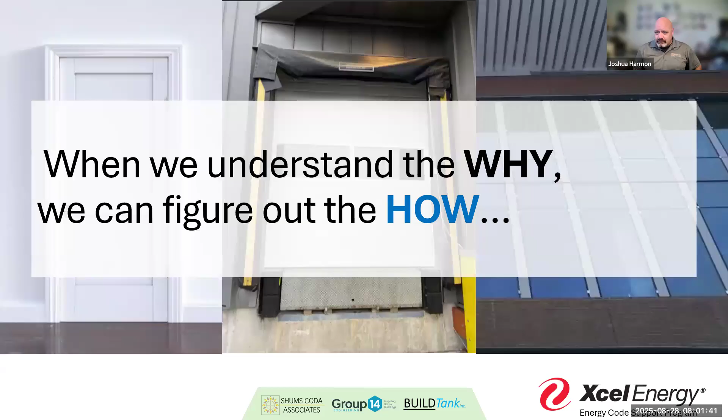When we do these trainings, I think one of the things that's important to me, and I've said it every time we get together, is that when we understand the why behind what we're trying to accomplish, we can better figure out how we actually do it. I know it sounds like we repeat it over and over, but it's fundamentally important to understand that in the adoption of the energy code by the state, we're looking at a system of codes and regulations designed to be flexible and innovative in providing effective use and conservation of energy over the lifetime of a building.

That's really the plan. I get contractors and plans examiners, or designers, who say it's really difficult to make it fit the energy code. Well, you might be looking too narrowly at how it's supposed to work. Some of those provisions that allow for different types of fenestrations, material selections, or design variables, those are all there because ultimately what we're looking at is the intent of the code. The intent is to provide a flexible method of identifying energy use and monitoring, maintaining, or doing what we can to conserve energy use in that building system, whether residential or commercial.

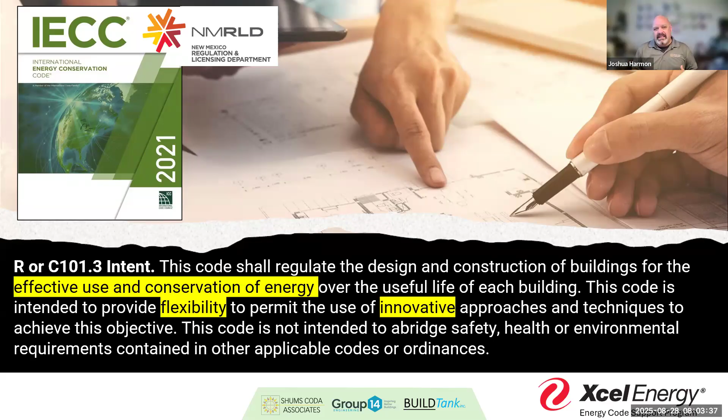And a lot of times when we think about it, fenestration is one of those pieces that comes in. It's one of those things we know buildings are going to have. If there is one section of the code that I regularly put into my plan review comments, it's on fenestration, because we know where they go. We address issues of glazing safety, we understand impact areas and things like that. But the one thing we don't really talk a whole lot about, or at least adequately understand, is windows and fenestrations.

I taught a class recently this week on residential mechanical ventilation systems - what does ASHRAE 62.2 say? Next, in a couple weeks, I'll be doing the commercial side. One thing we talked about was that when we look at a building, where do we see the greatest level of air leakage? It's really around these fenestrations.

That's why if any of you have done spring cleaning, or preparing for the fall cleaning before winter, you start checking. The first places I clean are the window wells. And you'd wonder, how do the window wells get so dirty? Have you ever noticed that dirt isn't uniformly applied? It always accumulates at the corners. Why? Because that's where air is moving. We understand there's going to be some leakage - no window is perfect unless it's a straight piece of glass.

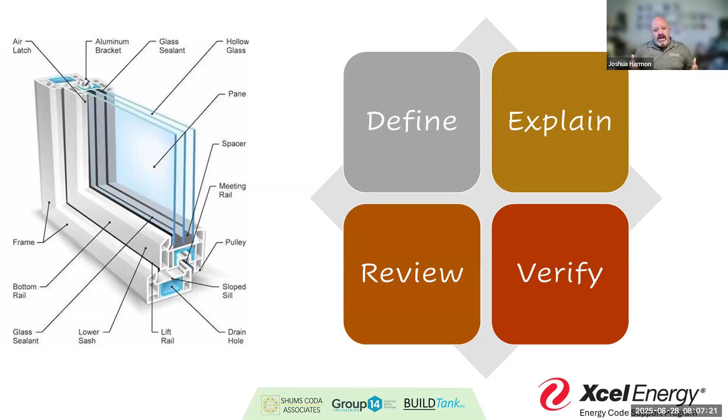When we review buildings, whether commercial or residential, one of those key four pillars we're looking for is our thermal envelope. Within that thermal envelope, we're looking for four key considerations. When I do plan review focused directly on energy compliance, I always look for these four key characteristics of the building thermal envelope. Not to say I don't look for other things, but these are the four key things I look for every time: the location, the materials, the fenestration, and the air leakage associated with it.

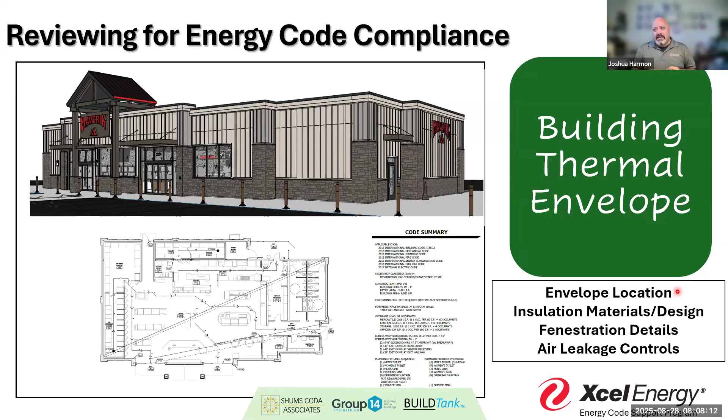That fenestration is one of the things that in plan review I am constantly reminding people of their responsibility to provide those fenestration factors and solar heat gain. They'll tell me it's an interior, they'll tell me the size, they'll tell me it's going to be this jamb or this material, but what they fail to always include is a column or section on that. Very rarely do I consistently see a column that says here's the solar heat gain, here's the projection factor for this window, here's the U factor for that window.

A lot of times we'll get some information, and we'll talk about the information we do get. But these are fundamental things we need to understand so we can evaluate this for code compliance. Because ultimately, remember, that's what we're trying to do: verify that this building is going to be compliant, that the uniform expectations we have for buildings throughout all of New Mexico are followed. That means we have to think about these systems or assemblies within our wall system.

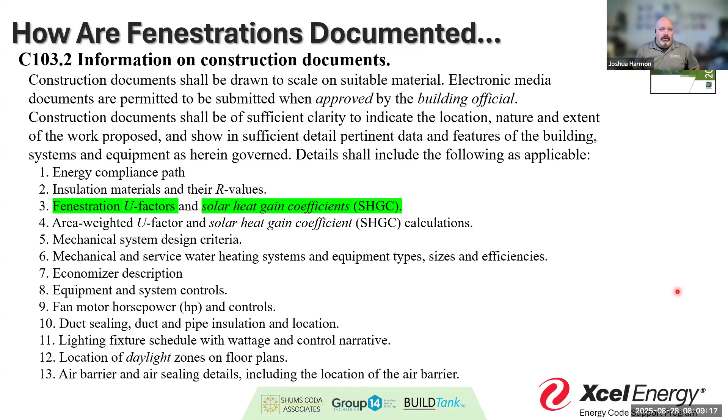It also facilitates the inspection process. If I know what I'm looking for, then I can better actually verify it. If I walk on site and all I see is that I'm looking for a 3050, or a specific size window, and that yes, I know this needs safety glazing, and that's all I'm looking for because that's all the details I have, and U factors are a third item in the list of importance and so they're not included, then I'm going to have that problem of, okay, well I saw the safety glazing etching, I saw the sticker, I'm good.

I just move on, right? I'm not looking at that paper that says, oh wait, I've got a 0.3 window and the plan calls for a 0.27. I could sometimes even verify that before the windows come in. The contractor can verify that depending on how the inspection schedule is going, so we can make sure we order the right things if we're clearly aware that these things are in there. That's why I usually find a comment related to it, because I know my inspector is going to want to see that when he gets out in the field.

Those openings are part of what the New Mexico building code requires us to evaluate, under 14539 — I think it falls under multiple places. We're looking for that opening flashing, because we understand the impact of air movement. We don't need dirt, dust, debris moving into our occupied spaces, affecting potentially some of the different thermal resistance materials, or affecting the indoor air quality.

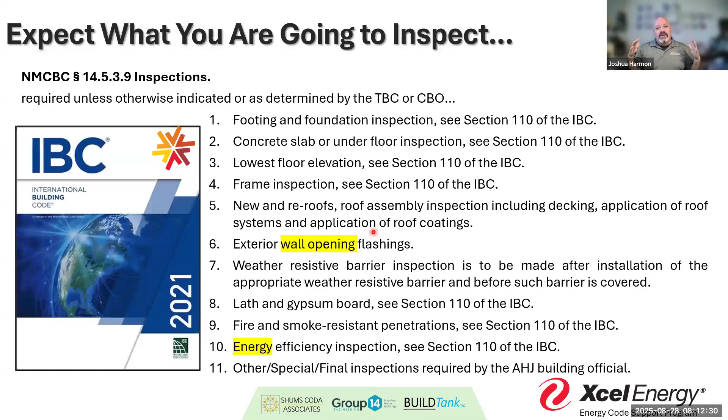So again, that's one of those things where when we think about that in the context of a home, we want to have a controlled environment. We think about that in the context of an office— I should have said office first. We think about it in the context of a home, whether that's residential or commercial code, we're looking for those openings, making sure they're properly flashed so we can control the environment. We can control what's going on inside — get the light, control the air movement, control that thermal heat gain or thermal loss.

And we can also roll into our energy inspection expectations — that's a whole other conversation. In my experience, I've tried really hard not to make or identify a separate energy efficiency inspection. I try hard to throw energy into all of my other inspections so that it becomes second nature to the contractor — when I'm doing a framing inspection, I'm looking for that air barrier, I'm looking for that moisture barrier. If we're going to throw in some insulation, yeah, we might have to do an insulation inspection, but really what we're looking at is the continuity of that insulation in relation to the other systems. So I'm going to look at the framing while I'm doing that insulation inspection. Digression aside, I think it's really important that we try to naturally create that recognition that it's all part of the same inspection practices.

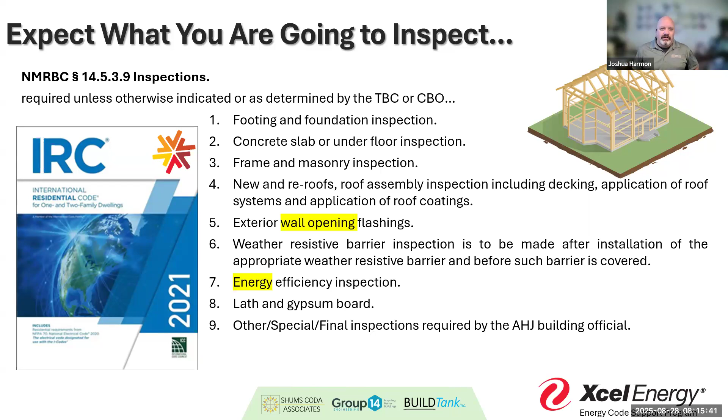So it's something they're supposed to be learning to do. I think more and more we're going to see it become common practice, a general awareness, even in some smaller towns, because you get a new system with all these new requirements, and someone's got to read on it. Hopefully it's those contractors.

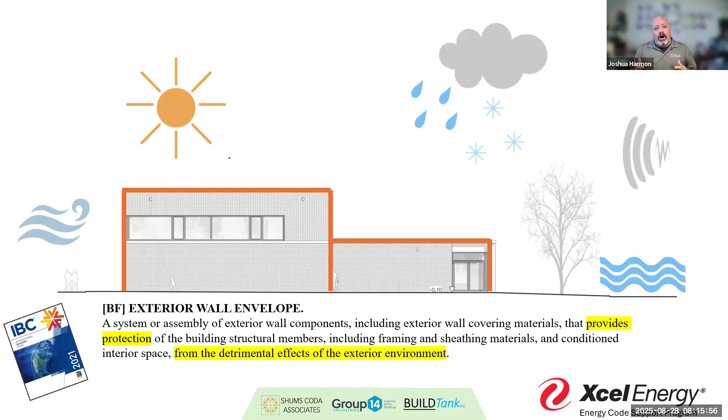Windows, fenestrations, and doors are part of our building's exterior wall envelope, separating the environment from the interior, but they're also part of the building's thermal envelope. This is why it's important to mark this out, because you may be in an environment where the thermal envelope is not consistent with the building's wall envelope. The one and the other may not always be the same. That's why it's important to understand and have those visual depictions.

We were looking at a grocery store the other day, and they made a special effort to insulate a vestibule area so they wouldn't have to control the temperature inside it. Or again, a bank - we all know some banks have that walk-in area where you can get access to the ATM, the anytime machine I call it.

No, I'm just kidding. Digression.

When I go into that room, I know I'm going to be inside a space that operates outside of the general operating schedule of the bank. So again, how are they ventilating it? How are we maintaining that? What type of fenestrations are we putting in to make sure we have consistent safety as well as thermal separation?

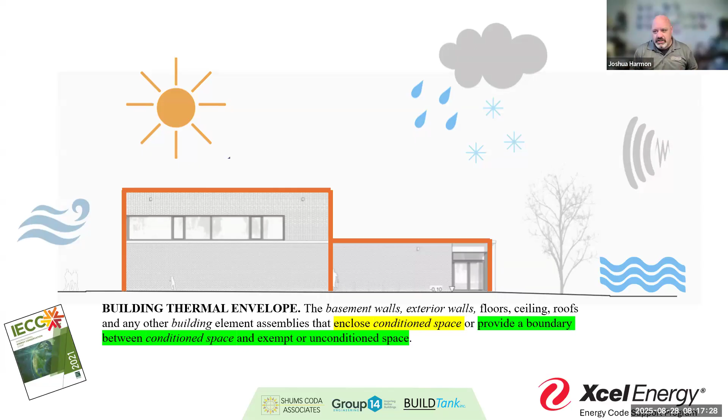I asked the question, when is a door not a door? This is the old dad joke right there. We all know - when is a door not a door? When it's ajar. Wah, wah, wah.

But really, what we think of as a door - the code provides us a variety of ways to define it. We have a building entrance, which is that portal used to gain access to the building from the outside, so we have expectations about entrances versus building entrances versus entrance doors. An entrance door is a door that's used - we see it's a vertical fenestration over 50% glazing, but it's more for occupant egress and access. We may have a building entrance at the front, but all of us in our offices know there's that back door.

We can always go out that back door when that one citizen, that one contractor comes in that just drives us crazy. We all know that door. My door was right by my office, and when I would hear a particular voice, I somehow magically had to walk out to the truck. My secretary, our permit tech, knew - she'd say, oh, I'll find him, he's not at his desk, but I'll find him, hold on one second.

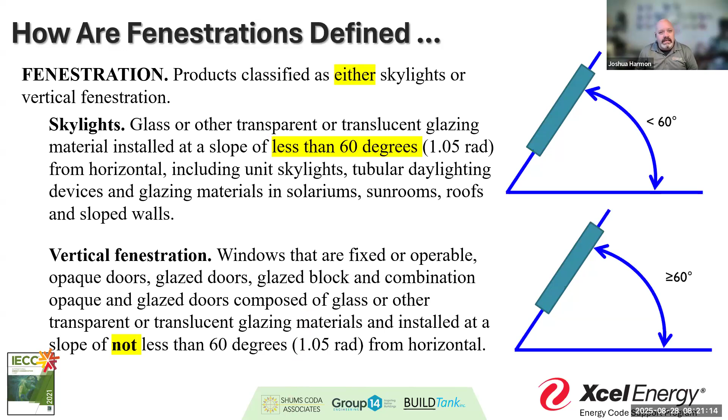We understand that buildings in general, and the code has required this for many, many decades, require a level of natural ventilation. When we're not providing another alternative option, we provide natural light. So again, we'll see a lot of windows in buildings. That's supposed to be 8% of the floor area. On average, I'm seeing most wall surface area, in residential, somewhere between 12 to 14%. If you're up north where you get a lot of cold or a lot of wind, you may drop that number down, but I've not seen it go below 11% in most of the plans or projects I've reviewed.

But when we look at that number, the reason I bring it up is that number is provided if we're doing a COMcheck or REScheck, we'll see that percentage of fenestration area. That's a wall surface area. The code requires us to calculate it based on floor area, the 8% of the floor area of each room. And then we have to provide openable area for ventilation, at least 4% of that, or half of that potential window.

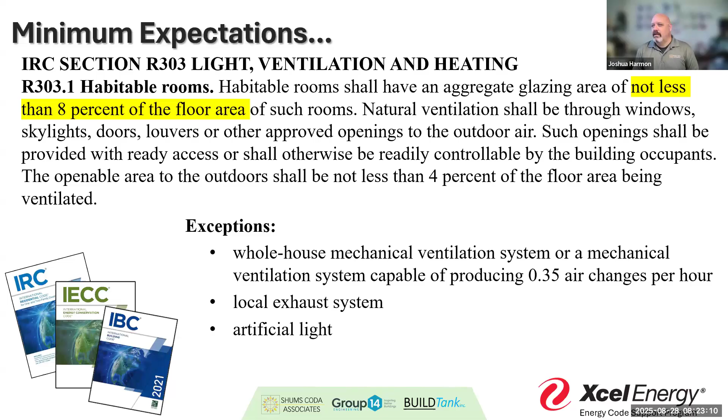But that same expectation we find in residential, we see in the commercial code. The commercial code also addresses natural light. So it's not just residential properties that have to have light; commercial buildings have to have light as well. Now, what I want you to notice is that this is not conditioned floor area. A lot of the skylights identified in the code are when we're talking about non-conditioned spaces, where we're trying to bring in solar heat gain to illuminate and then semi-temper those unconditioned spaces. Now, the code doesn't specifically say unconditioned versus conditioned, but I think that's one of those underlying themes you'll see when you look at when and why it's addressed the way it is.

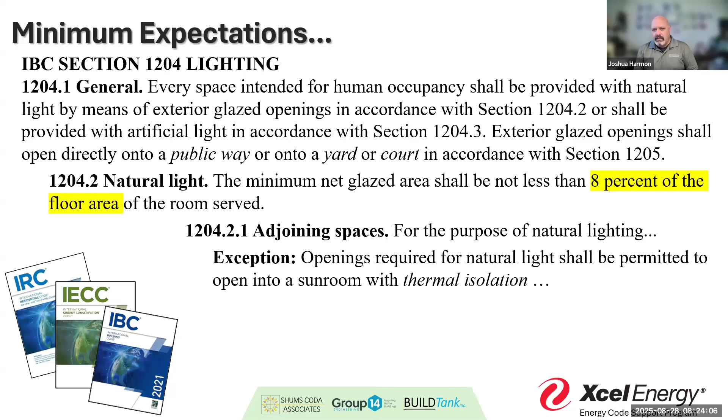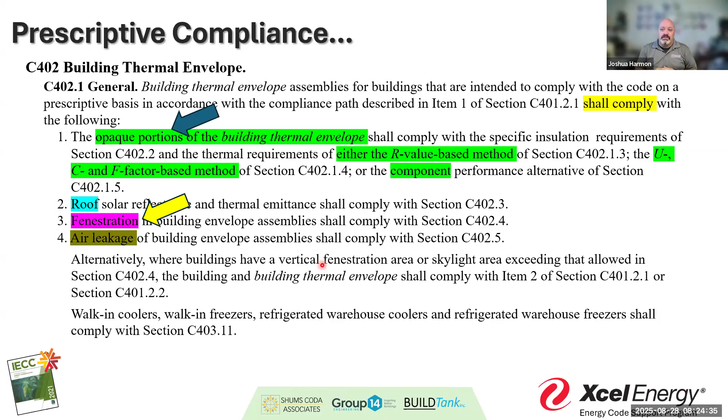When we look at the energy code, we know that as a building, there are certain things we're looking for in that building thermal envelope in the commercial provisions and in the residential provisions. Ultimately, we identify whether they are opaque elements of the building thermal envelope or fenestrations. In residential, it's all in one section, within that idea of insulation and fenestration criteria. In commercial, we break it into two different concepts, different sections or subsections within section 402.

I wasn't going to read all that. I just wanted you to know they're broken out.

One of the things we think about too when we look at REScheck or COMcheck, both are mechanisms, mathematical calculations where we start to trade off different elements within that building thermal envelope. They incorporate, and do not separate or distinguish between fenestration and insulation. So they look at the entire system that makes up a building thermal envelope. Not just insulation, it's both systems as we do that comparison, where we may drop down and be more efficient in a window in order to become a little less efficient in a wall system, or vice versa.

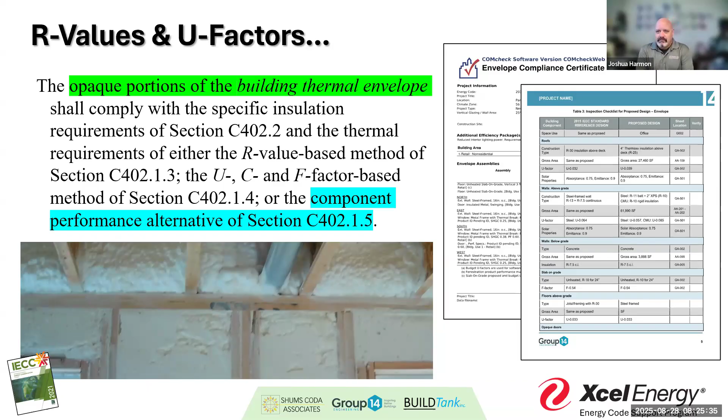Now remember, when we think about this, what we're doing is we're looking for that table.

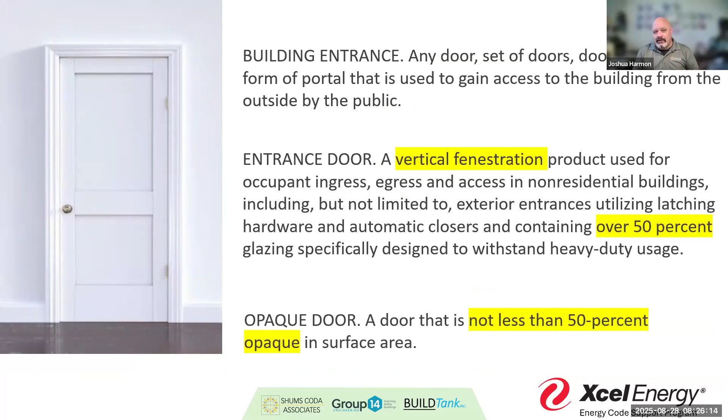Normally opaque doors we'll find down here. So remember, if it's an opaque door versus a building entrance, we might have differences. Where was our definition? An opaque door is different from an entrance door that has that fenestration. So we're going to treat that service door, that all metal door that nobody really thinks about, separate or different than what we expect in that fenestration.

Now we're looking at table 402.1.4 in the commercial code. There's our values, that non-swinging, swinging garage doors that have less than 14% glazing. We're looking down here.

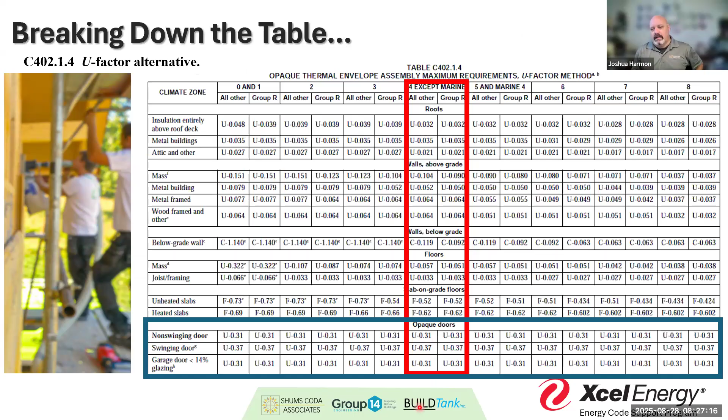Similarly, when we move over to residential, like I said, in section 402.1.2 or 1102.1.2, we don't use the 11, we use the 4 because it's in the IECC. What we're looking for is those assemblies, part of that assemblies and insulation table. We're going to see here that we're looking at that 0.30 for that fenestration versus 0.31. So depending on our values, we might get a little bit more flexibility in an opaque door than we do in a fenestration, because what we're thinking about is not only air leakage control, but that U factor value.

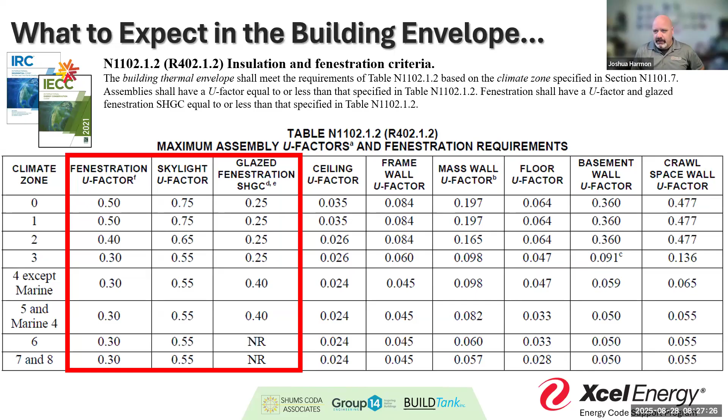If we look at it over time, and I put up here climate zones 3 and 4 because I know that covers a lot of the area, when we look at how this has actually changed, I like to once in a while remind us of how this has changed over the past 15 years. Yeah, 15 years, from 2009 to the current code, and in the future we can see a little bit of difference. I only want to show you this so you know.

And I will, these are the models. This is obviously, I forgot to clarify, I just grabbed model numbers.

We see that these numbers have not changed, or they took a drop back in the '09 to '15 transition, but from '15 through now they've really not changed much. As we look into the future, they don't change again. Our skylights, they don't change, they haven't changed until the future. And our glazing, our solar heat gain in climate zone 3, has consistently been that 0.25.

And we know the ceiling R-value, I kept that in there just to show us. Remember, we went with a 38 value, we moved forward and took that 38, so that we maintain. But look at that R-value in that ceiling, by keeping it at 38, it's not changed in 15 years. So when people say insulation is becoming the problem, it's not really the problem, it's flexible.

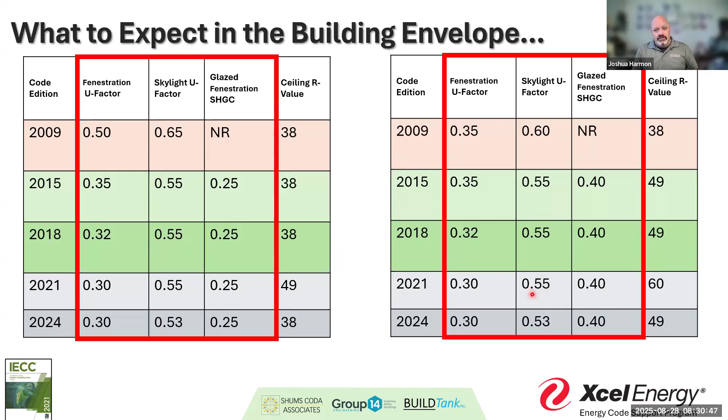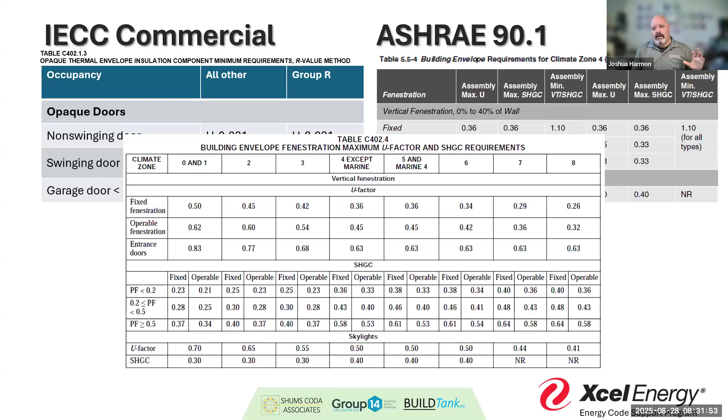And as we talked about, our opaque doors - one thing we think about in commercial specifically, like in residential it's all part of that insulation and fenestration. In commercial, we go to the U factor table in Table 402.4 to get values for vertical fenestrations - that entrance door versus that opaque door. Opaque door is in 402.1.3. The entrance door that has glazing, 50% glazing, will be found in 402.4. That's where things sometimes confuse a contractor or plans examiner - not taking that break to say, wait, am I looking at a fenestration or an opaque door?

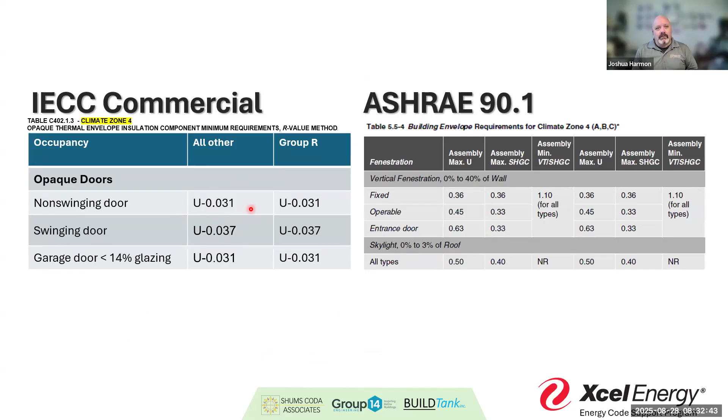I want to remind us, as we talked about before, the code does say that if we don't provide this, we have to make some assumptions. And those assumptions, whether in residential or commercial, are not positive in the way of demonstrating compliance. Because like most things with my kids, if I have to make assumptions, the answer is no. So if I'm going to assume some things about that opaque door that may not be accurate based on what we're seeing in the building - if I'm seeing an insulated metal door, I've got an opaque U factor of 0.6, whereas the code is telling me I need an opaque door that's 0.3 in climate zone 4.

So again, assumptions are not positive when we start looking at compliance values. But really, what are we getting back to, what is it that I'm reviewing for? I'm looking for that thermal resistance - what is the U factor, what is the solar heat gain, what is that proper design, are they used effectively? Do we see proper vapor and air leakage controls, do we see proper flashing identified? Where do we see it in context with the rest of the building's thermal envelope - are we creating that continuity across the system? Remember, we're looking for a continuous air barrier, a continuous thermal envelope.

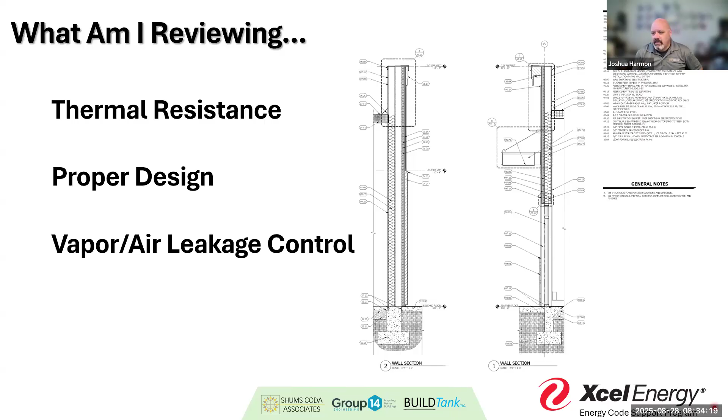What we don't want to see, and we see this once in a while especially with alternative building designs - I've had conversations with people, I had somebody looking at doing a straw bale home, and they're going to do an 18-inch wide envelope. So I asked, where are you putting the window - on the furthest edge or the interior edge? And what are you doing with that 14 or 16 inches of dead space? Are you going to flash it so we have good drainage, or is it just going to be a seating area? We need to have that identified so we think about it in that design process. That affects what we do during inspections, because we're looking for those same things - if I know they're on the plans, I'm verifying them in the field.

So again, what is that thermal resistance? You told me 0.3, I'm looking for a 0.3. I'm looking for that proper installation. If I have those good flashing details, then I'm going to make sure that they're properly flashed and installed. And again, I'm looking for that potential air leakage.

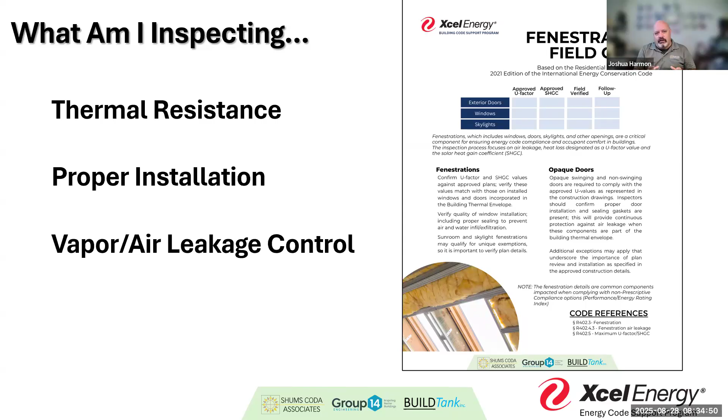We've shown image after image that fenestration is going to be one of those critical places where air loss happens first. I showed you some of those digitals when we talked about air barriers, and that hotel I was at in Albuquerque, where I was holding up the camera and looked down, and you could see light through the door. Because the rubber gasketing that had been installed was now gone, and so now you had a 20-degree difference in temperature in that assembly.

And so that's going to affect things. Those are the things we're thinking about.

I recognize that for the most part, when skylights are leaking moisture or rain, we'll notice that. But when they're leaking vapor, we don't recognize it as much. When you start doing spring or winter cleaning, you can see where your air leakage is taking place a lot of times in the window system, because you'll see a little bit in that corner on the left side. You think, okay, something's wrong here. What do we need to do? Do we need to caulk it, seal it, or do something to control that environment and maintain that equipment?

Now, we're not maintenance people normally, but a lot of us get involved in things where we have to worry about maintenance. That's one of the conversations we need to have, and maybe that's a good opportunity. I use that as an opportunity as a building official to go into my community and say, hey, we're maintaining, do some spring cleaning. When you do spring cleaning, identify these types of issues, and this is what those are from. It's not just dust naturally settling. The reason the dust moves that direction is because there's air leakage drawing it from that pressure difference.

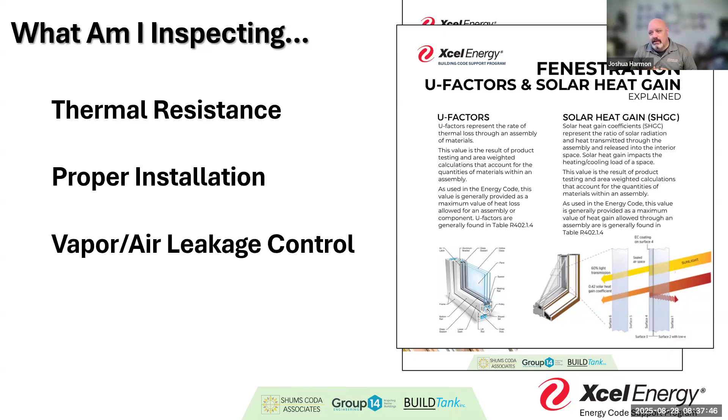So again, when we think about that in reality, the reason we have dust and dirt moving to these windows, especially with blinds - in my daughter's room especially, I can tell when she's had her windows open or not properly closed, because there's a little bit of dust at the bottom of her blinds. Why? Because air is coming in, trying to get into our pressure, trying to move from the outside in or the inside out. That's part of what we're looking for.

Digression, sorry. I'm never going to finish all these slides.

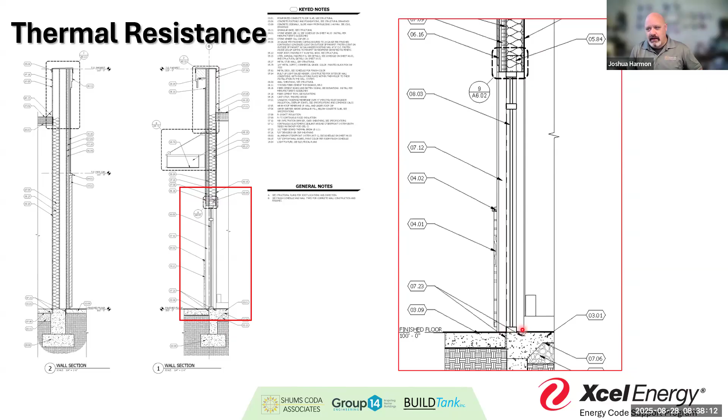So again, what we're looking for in that design is where those windows are going to be identified. This is our wall, our exterior wall. We've got a site-built door that's going in. We're making sure we have continuity, making sure we have proper gasketing, making sure that we have that jamb, and how are we verifying that we have good continuous air barrier control and thermal control?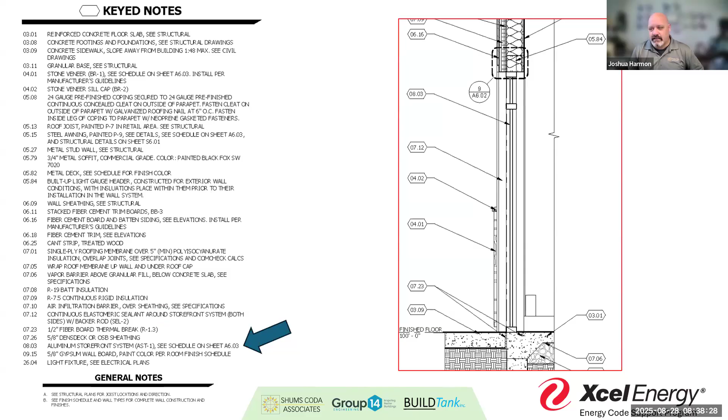Here we see that aluminum storefront system. It tells us to go to section A6.03. We go to A6.03 and start to see the material identified - you can't read it, but that says there's a storefront. But what it doesn't do is tell me very much about the testing or the level of thermal resistance associated with it. I'll show you another example where, again, this is a problem where it's like, you sent me somewhere and I got there, and once I got there, it wasn't working.

It reminds me of the first time I went to a restaurant my boss told me about.

I drove all the way down there, two hours, to go to this restaurant, to find out he hadn't been there in five years and they had closed. Same concept - you keep pushing me to this, go here, I get there, and then I'm disappointed. It doesn't just happen, it happens because of a lot of different variables.

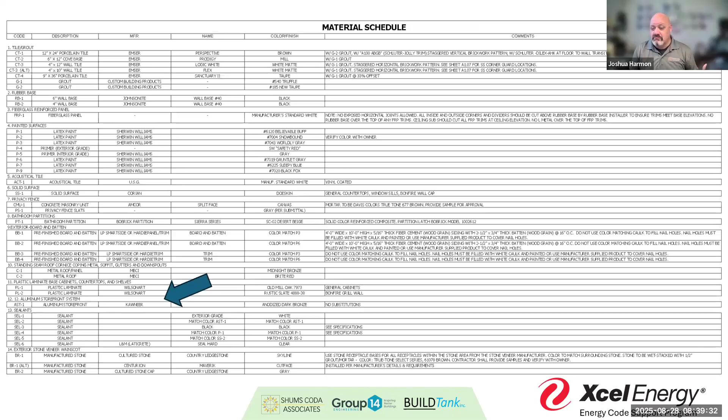So again, here's that place you sent me, that A6. You sent me to 6.03, which was this page. Even when I check out 6.01, I'm looking at the door panels. Nowhere in here do I see, even if I zoom in to these keyed notes, I see we have glazing, but I'm not seeing a simple declaration of a U factor.

I see that we have systems. I see that we're going to have tempered glass. I see that it's going to have coatings to restrict visibility into the office. I see these things, but what I'm not getting, again, in that metal frame, I'm not getting a good idea of what is this thermal envelope. What is that U factor? What's that solar heat gain?

Sometimes they'll provide us a COMcheck, or a RES check, and that will provide in those sections that proposed window system. So here I can see this is the only place where I found ever in this entire project a reference to a solar heat gain or proposed U factor.

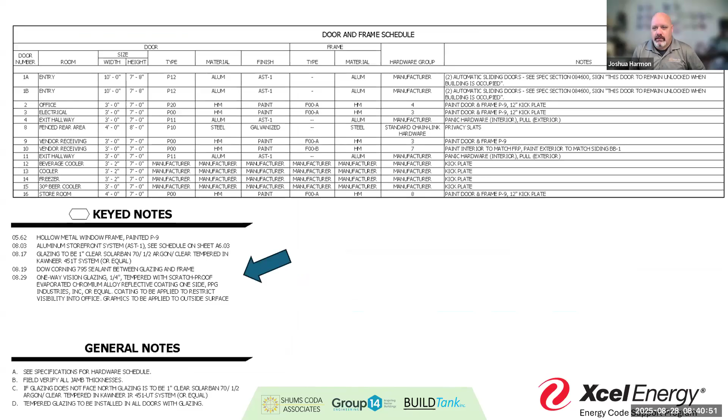Here's that storefront metal break, the Kawneer Trifab that we see identified here. We see it talked about here. That's the interior one. So again, that's what we're looking for. And so now I can at least confirm that that's the value that I'm going to see in the field.

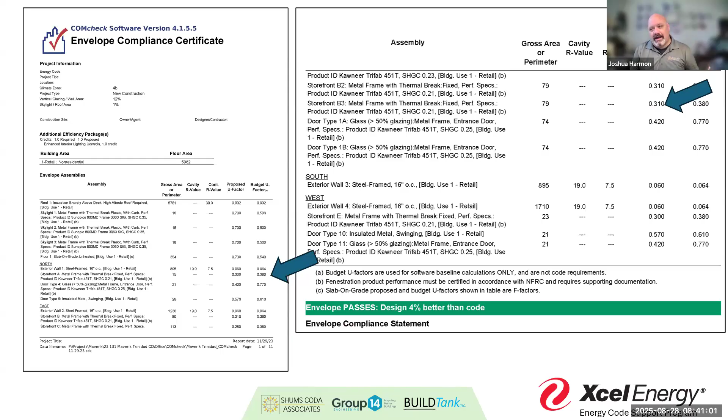Now, remember, U factor - we're looking at how much heat passes through the material. Solar heat gain - we're looking at how much it resists or allows through that wall system. And so when we're looking at those values, we're looking for solar heat gain.

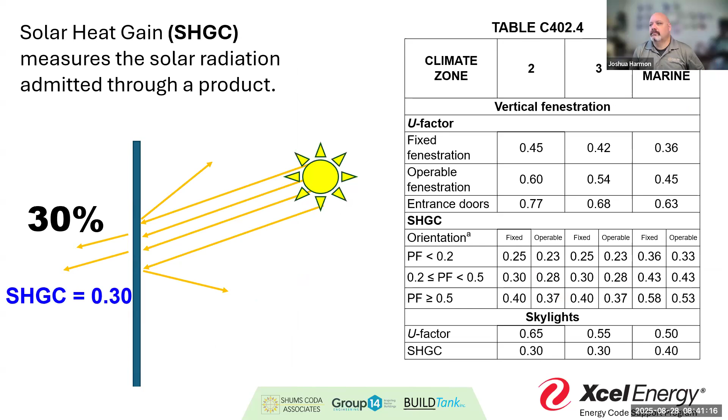Now when we review it, remember, we're looking at solar heat gain, or we're looking at that U factor. What type of opening it is will tell us what type of U factor is the minimum expectation. So we shouldn't have a window that's worse at restricting air movement or heat transfer than what we've got identified.

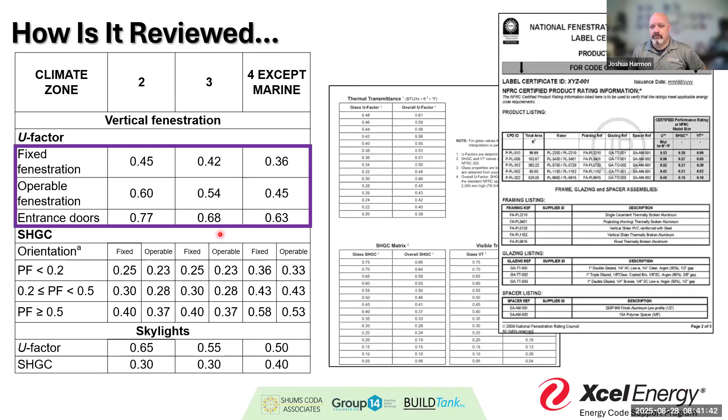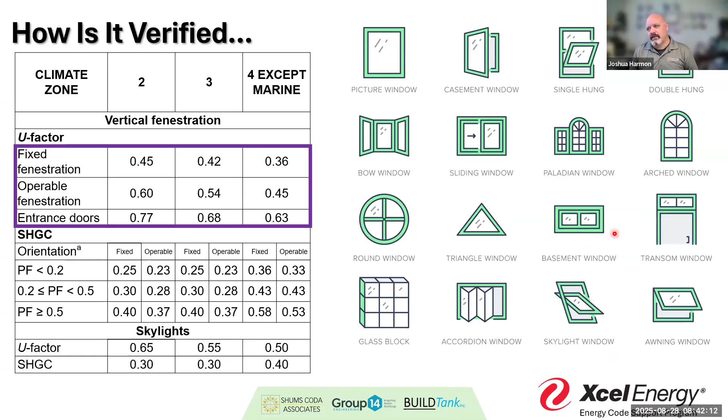And then similarly, when we go out in the field, we should be verifying these types of things and know that they're built different ways. So again, that flexibility is there. The code doesn't say you can only use one type of window, or that you can only use one manufacturer or one style. It gives us that flexibility and says we need to throw it into one of these three boxes to evaluate that U factor value. And again, all of these different designs will provide that information.

One thing that we're also looking for is that projection factor. Now, a lot of buildings may have a zero projection factor - code doesn't say you have to have a minimum. What it does is understand that if we have a projection over that fenestration, we are shading it, and therefore we are reducing potentially that solar heat gain through something other than the fenestration itself.

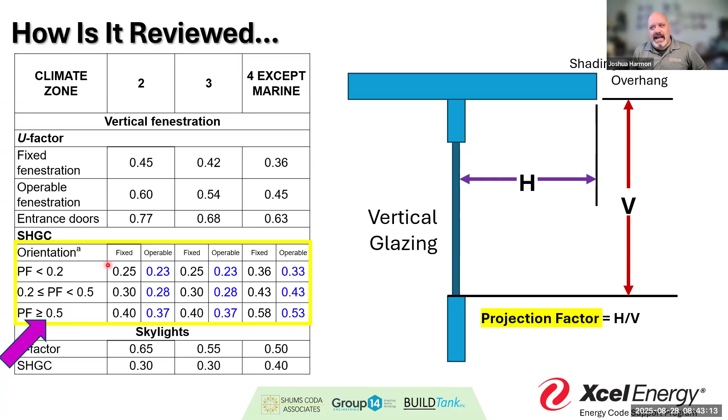So what we'll do is, depending on if we've identified an overhang, I'll say your fixed window has to do this, your operable window, this is your solar heat gain, depending on your level of overhang, your level of projection. I see a lot of projects that come in that have absolutely no concern, so they'll go with the highest expectation and put no projection. That's fine - just know that was an option you had, to cover it with some type of projection or covering so that you can reduce the overall

thermal heat gain requirements of the fenestration itself. A lot of times we see this, especially around large windows in office environments where we may have a covered walkway around it - perfect way to show that's a projection. We've got a little projection there. We've seen these, I think it was in Hobbs - can't remember if it was Hobbs or somewhere else - those canopies over windows specifically to create shade for the classrooms.

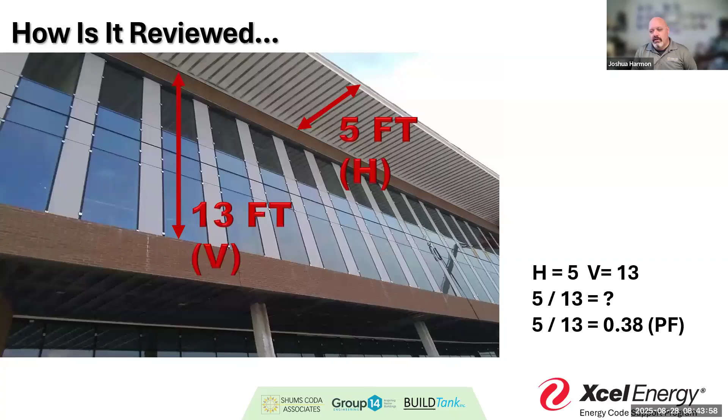And so again, we can calculate that solar heat gain through the projection factor. We've got a 5-foot height, or H, versus horizontal versus vertical. And so this window would then have a projection factor of 0.38 - it would fall within this line. And so as fixed windows in climate zone 3, they're required to have a 0.3, consistent with what we saw in residential.

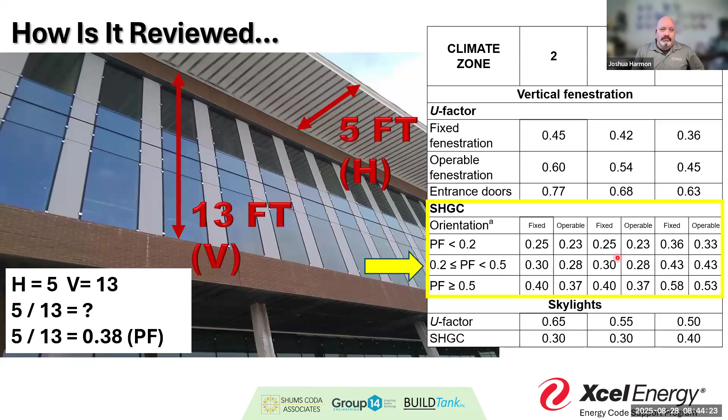When we start thinking about inspecting it, what we're looking for are some very basic things. We're looking for seals, making sure these fenestrations, these entrance doors, are properly sealed so we're not getting moisture accumulation. When we see the installation of new vertical fenestration,

we're looking for how do we transition, how do we seal, how do we caulk, how do we flash? I know there's going to be a covering over this material, but how is it currently going to be connected? Because unlike straight moisture, air is a smaller particle and can have impacts.

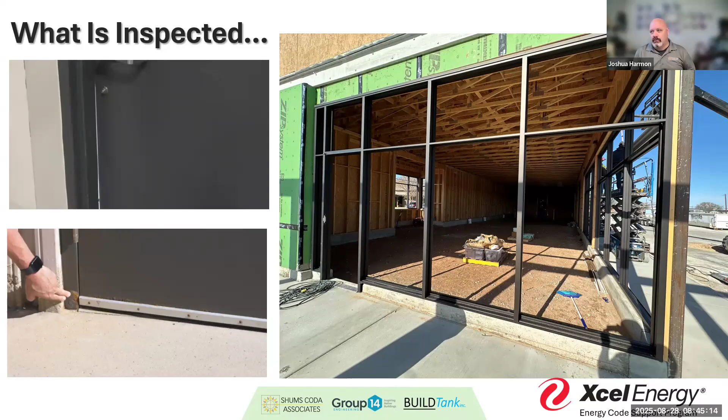In high wind events or high wind areas, it's going to have an impact on overall heating and cooling. That's why we need good flashing details, so that what we see in the plan is what we see in the field, not just a question of how we design it in the building.

Remember, there are methods for testing if we have site built or uniquely built window systems. Nothing says we can't make our own window or hire a local artist to do something crazy and unique - crazy in a good way. We can use our NFRC testing materials and testing standards to say this is what that window is going to be.

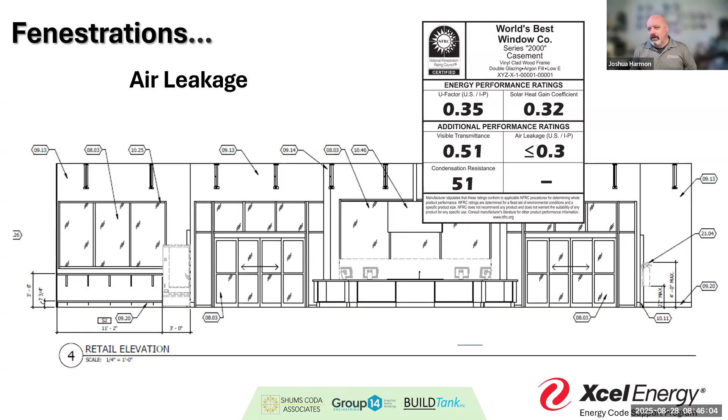The code also gives some exceptions to certain size windows, so we can allow for that level of flexibility. It's not that every window has to look the same - we provide that flexibility. But part of what we're looking at is air leakage, so it may be less about the air leakage of the window as much as the connection of that window to the overall system.

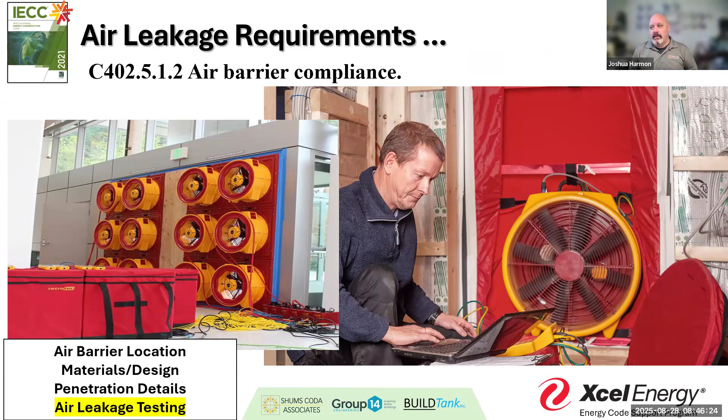We do a lot of that through air testing, either through quantitative testing or visual assessment - we're looking for different things in that process. Field fabricated fenestration, we're looking at different standards to say this is how we installed this, how is it supposed to be evaluated, what standard are we looking for, and how are we going to test it?

Sometimes we'll go out there, and this might be a pressure test. Some of these we can maybe show up to, and some we're just going to take a certification. Nine times out of ten, in my experience, I have very rarely ever been on site during a testing process or a commissioning process - it just never works out for my schedule as a building official.

So I got all kinds of certifications that came in, and I put them in the file to show if anybody ever asked, what happened to that? Did somebody test that window? Absolutely, here's a certification. And if somebody lied to me on that certification, that's a whole other conversation - you lied to the government. How dare you? Don't get me started on what happens to people that lie to the government, or should happen to them.

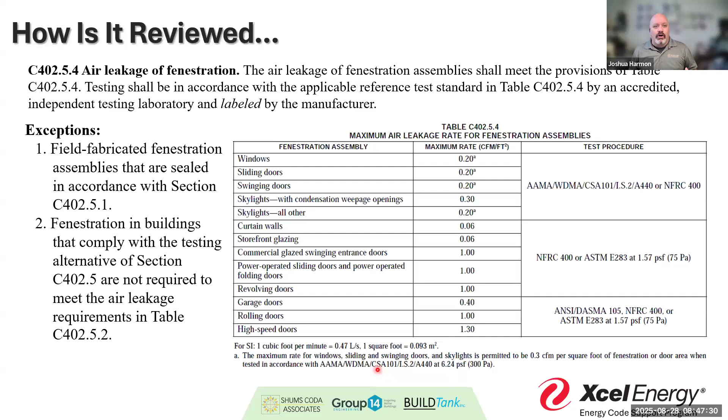But again, what we're thinking about is how does the system overall work - not just the fenestration, but the fenestration's connection to our existing building thermal envelope.

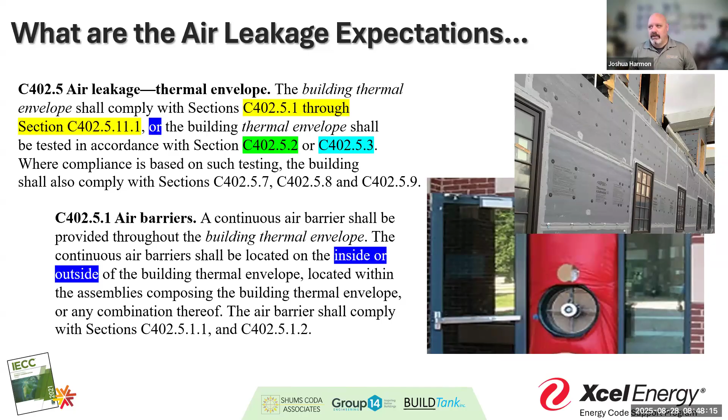We know air leakage is a process, both residential and commercial, and there are different ways to evaluate it. But there's more than just that one thing we're doing when looking at windows. That's why you don't have to necessarily go do a window inspection specific to energy. We're already out there looking at egress openings, emergency escape openings, and how these things are properly installed. So it's easy - when I'm looking at a window, I don't have blinders on to look at only the quality.

I remember I did a window inspection in a second story addition. The question was, well, we're just here to talk about the opening size - we want that emergency escape opening size, 5.7 square feet of clear opening. When I got there, I was like, but that's not the only problem. We got some flashing problems, we don't have the right cripple layout for it, this isn't going to support - they had no cripple joist under it. So they asked, well, what? We just want to make sure this window works. No, it doesn't. There were 5 things wrong with that window's design.

So again, when we're out there, we're doing more than one thing. I think that's important for us to remember.

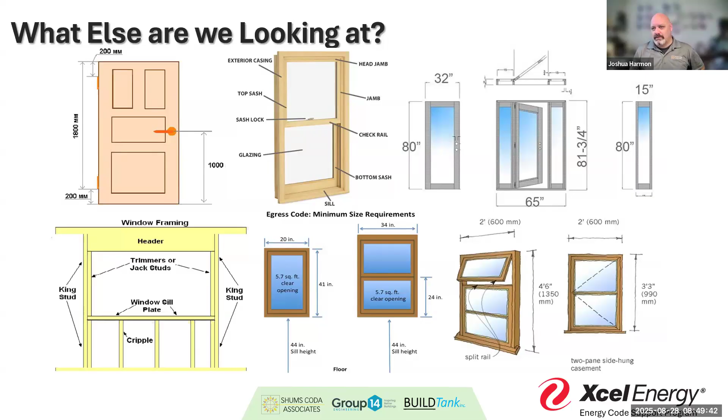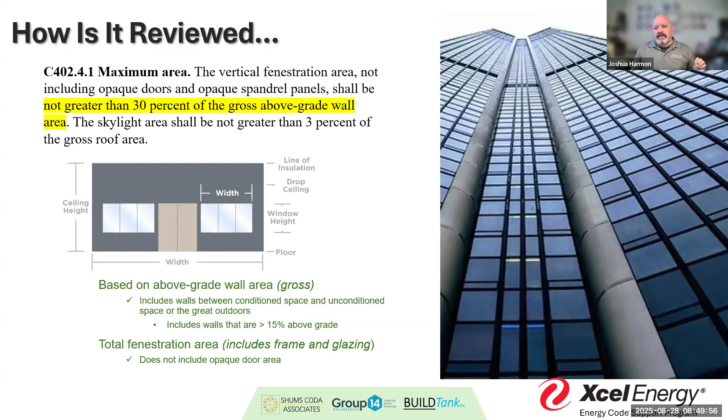I'll throw this out there as a reminder - when we talk about exterior vertical fenestration, the code says there's a maximum of 30% of overall gross wall area. However, if we get to that 30, we can choose to go a little extra in climate zones 1 through 6, up to 40%, as long as we meet all the expectations for visible transmittance of the glass, daylight controls, the size of the building, and quantifying that daylight zone.

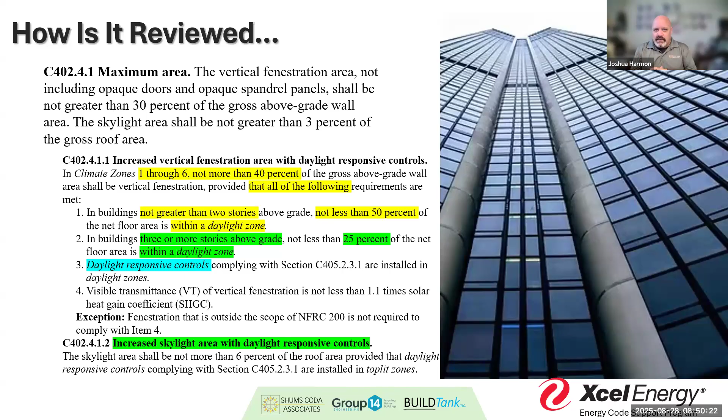Now we've not talked about daylight zones and top lit zones in this context, but those are important to calculate. There are minimum expectations about skylights based on the type of occupancy and the size of the space. We're supposed to have at least 2,500 square feet, no less than 3% of the total under that roof.

These requirements apply in different areas - office atriums, lobbies, concourses, corridors, storage, exercise, convention centers, automotive service areas, manufacturing areas, non-refrigerated warehouses, retail spaces, distribution centers, transportation depots, workshops. Part of the reason we're doing this is to get additional lighting into these spaces that we know are going to have a lot of energy consumption in the first place.

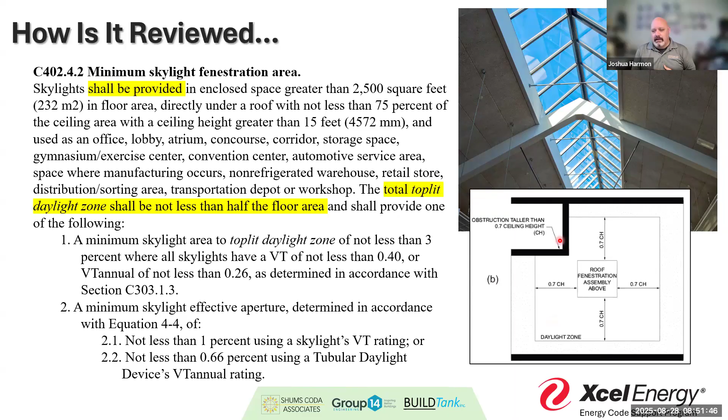These specific types of uses are meant to have these minimum fenestration skylight expectations, and that skylight comes with a top lit zone we have to calculate. So a lot of times we see these utilized. However, no matter what we say - we create a maximum, we have a minimum amount, we have a maximum amount - we always end up with some weird design.

We have times when we create atriums that have these huge spaces of windows, and we're not really thinking about how that's going to affect the overall heat consumption - that solar heat gain. This was right outside Dallas, at the Gaylord Resort.

I was there a couple months ago, and it was a beautiful day, nice and cool in the shade inside. But when you walked out into the lobby, into this little atrium area, and that sun was coming through that glass, it heated up pretty quick. I'm fanning myself, trying not to sweat to death and embarrass myself in front of other people, because we're not thinking about the ventilation requirements and the impacts in some of these designs.

So again, that's something the code is starting to move us towards - think this through as we get to this.

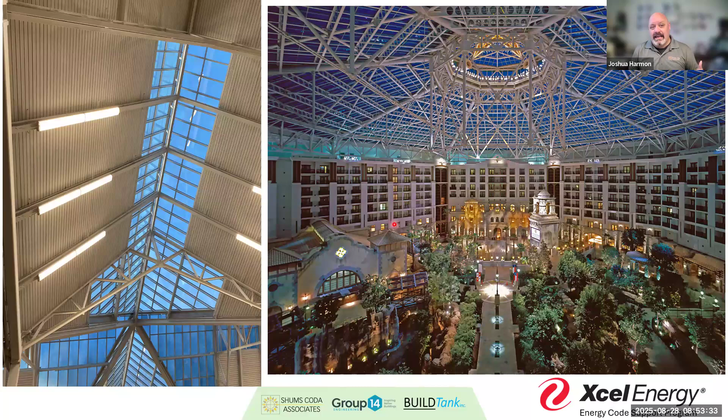And when we exceed those 40% values for vertical fenestration, we have to go to an alternative compliance path. If we're going that direction, I'm really going to focus on ventilation and mechanical design, because I've been in that kind of environment. Those windows are going to be creating heat inside those spaces, even in the middle of winter. So how are we ventilating and maintaining the temperature so it's not 85 degrees inside the building?

Digression, but there are certain exceptions to the skylight requirements, and the code provides for different climate zones. Those climate zones might happen in some of the higher elevations in New Mexico, but for the most part, we're really looking at what is the daytime operation, right? Because we're expecting this is going to happen during the work day, that 8 to 4 p.m. How many hours are people going to be in this space?

If we don't use it, then it's really of no value to have that skylight when it's dark, because a skylight can turn to a dark light real easy and start to create that glowworm effect. I call it the glowworm.

Especially in today's communities, a lot of them are creating dark sky requirements, where we don't want these huge areas of external illumination. I have a project that has a huge skylight as part of an atrium, and at night when they turn on all the lights inside, it turns into what looks like a literal spotlight shooting into the sky. I've gone over thinking, oh, are we doing an event? Oh no, it's just the atrium lit. Great, right? So again, we don't want to create the glowworm.

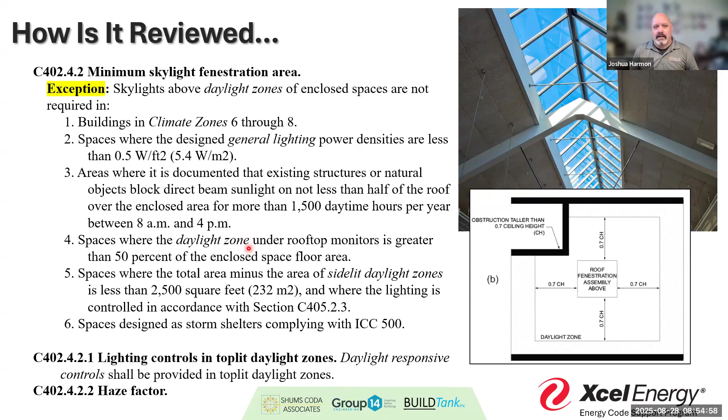So if a building is not going to benefit from those skylights, there's a way to become exempt to them. Again, we can use COMcheck or different mathematical calculations whenever we have those large numbers.

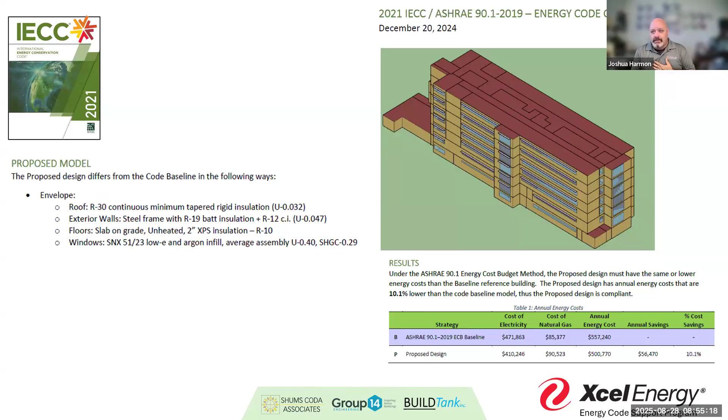So again, I've got a U factor calculation, right? But then I also see where they've got this entrance door is going to be not more than this, this, this, and this - insert a value. I need a little bit more detail, specificity. Is there certain areas? Or is the solar heat gain going to be 0.21, 0.25, 0.35, 0.40, 0.45, or what? I'm not sure, so maybe we need a little bit more definition on that detail.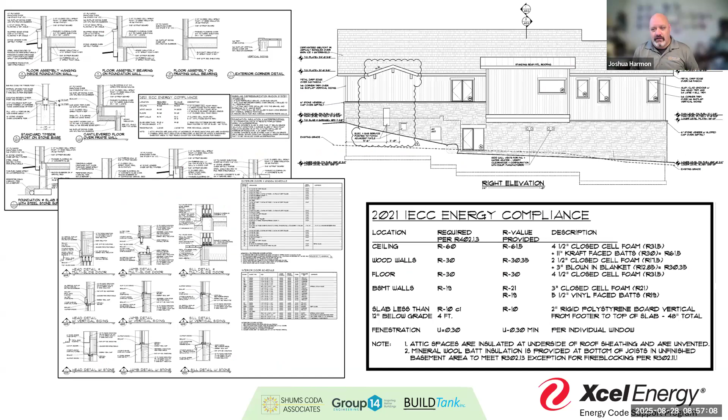Here's a quick look at a house. Again, we've got all the R values, what's being provided, and then we have this nice note down here - this is my U factor, my minimum U factor, right? Great to have, that way when I go out there I know what I'm expecting as far as a uniform window system. All windows to meet the energy code. But again, we see that number there in that energy compliance table they provided.

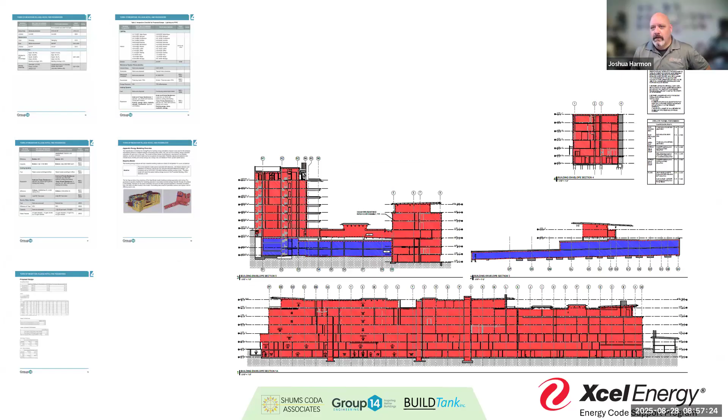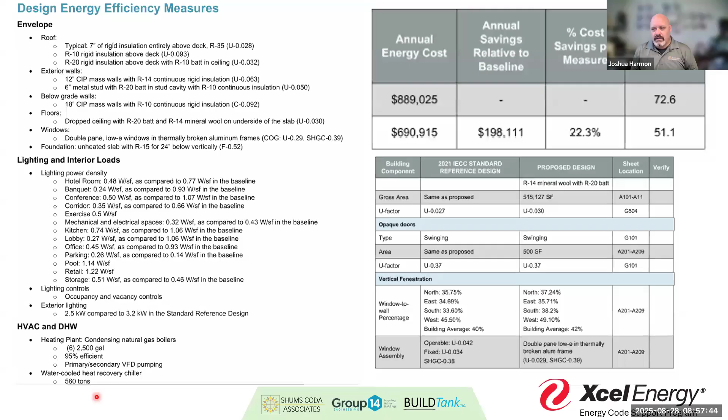Here's another example of a hotel. There's an energy compliance methodology, and so we have those opaque doors. Part of that mathematical calculation, that process that's run, is based on what types of windows - what types of vertical fenestration versus opaque doors versus other window factors. And then how do those, and again this is the application, we see where those windows are going to be. And so they've labeled them - these windows are going to be here, these windows are going to be there.

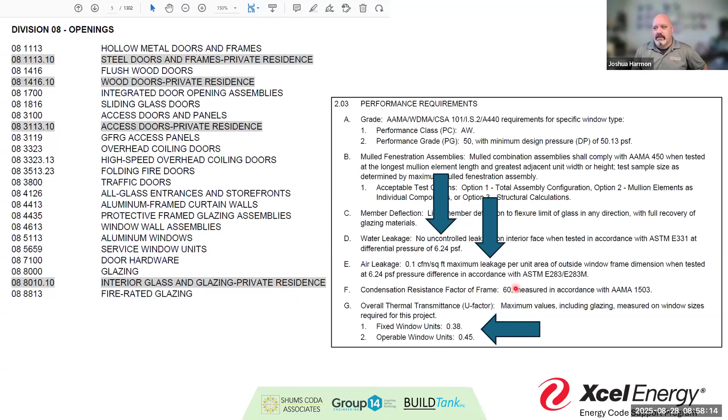We can kind of see some of those air leakage requirements, those thermal resistance values, and the air leakage rate associated with the window itself. We're taking that even lower. So the question is going to be: they're going to be tested. How are we verifying that air leakage rate? Because they're taking advantage of that lower air leakage to justify part of their cost calculations.

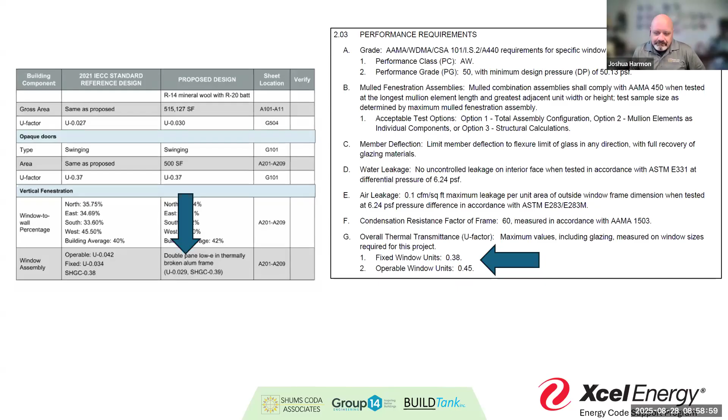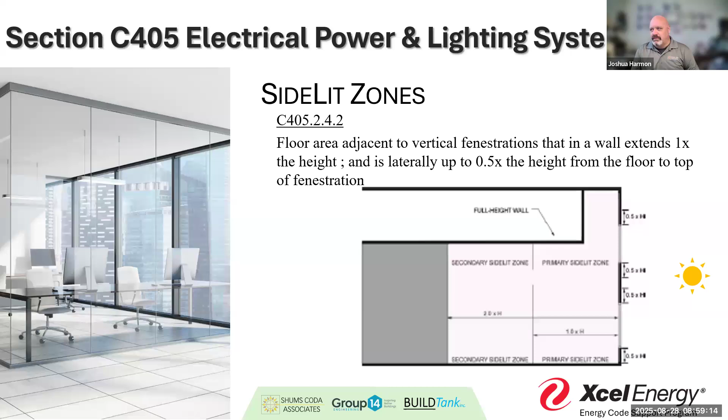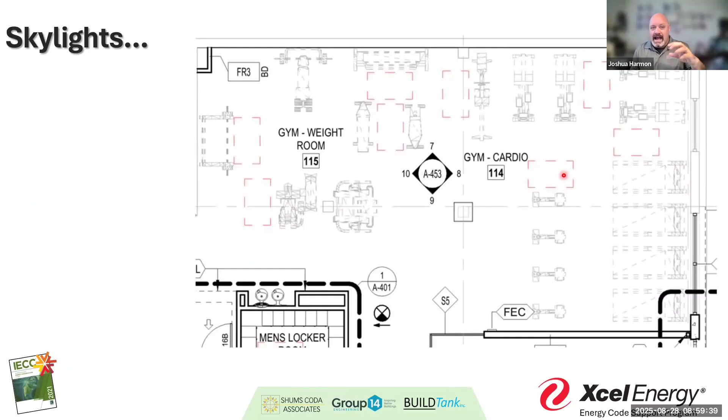But again, skylights and windows are not the only types of fenestrations we deal with. We deal with door seals, vestibules. Remember, we're thinking about those in the context of when they need to be applied, how they operate, and what those different exceptions are.

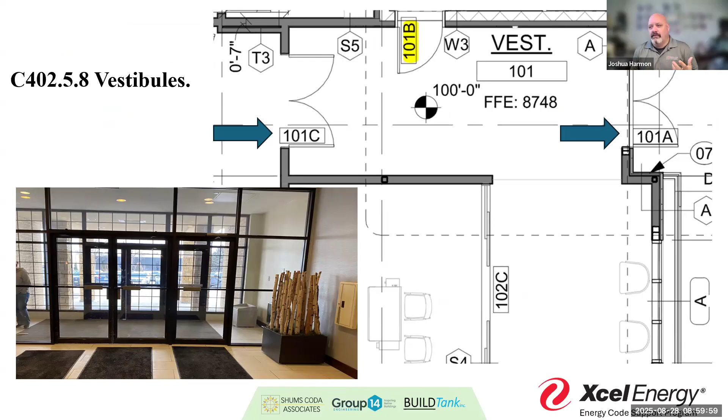The thing I've had a lot of lately, especially in residential—the commercial code addresses operable openings interlock, right? So that when that window is open or that sliding wall system is open, it affects the heating and cooling controls. I've been seeing that a lot in residential.

A lot of residential projects are starting, especially in beautiful places—there are many parts of New Mexico that are beautiful—where people may want that slide-away door or wall panel system in new construction to take advantage of the beautiful setting and the low humidity. So when we have that, make sure we're thinking about those controls, that we deactivate one system. I saw late last week where they deactivated the heating but activated the ventilation to create a positive pressure, trying to restrict air movement or particulate getting in. They created a positive pressure to keep pushing out air so dust wouldn't fly in. Think about it and how that would operate as a design.